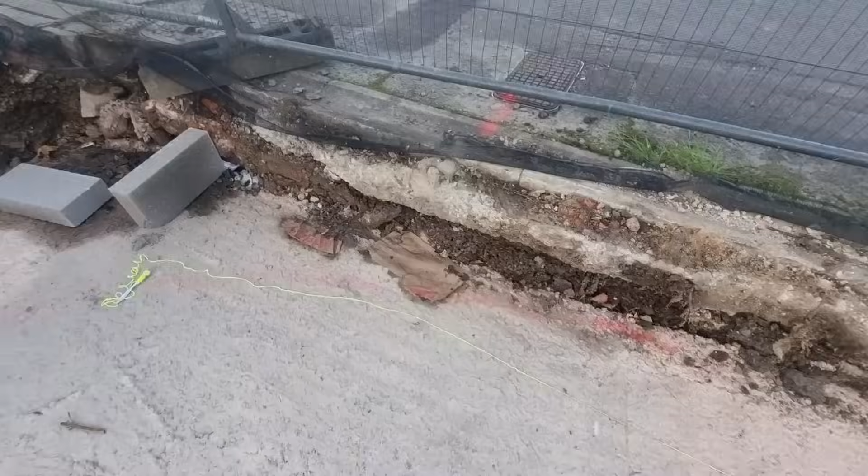If you're wondering where this beautiful job has come from, it's from the one and only Mr. RJ Brickwork himself.

So the first one we're doing, myself and Kev are here doing this wall together. Kev's putting the line, doing a rack up that end, I've done mine here. We're now going to run this section in because we're going to turn into some steps here. I'll show you it all on the drawing.

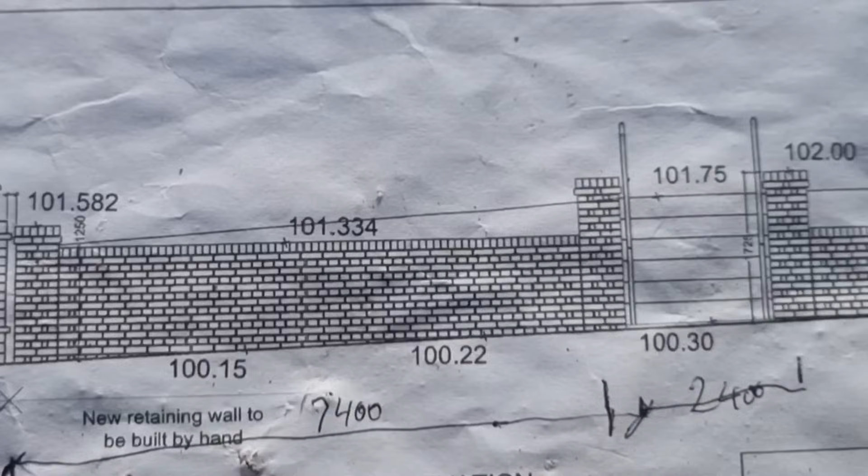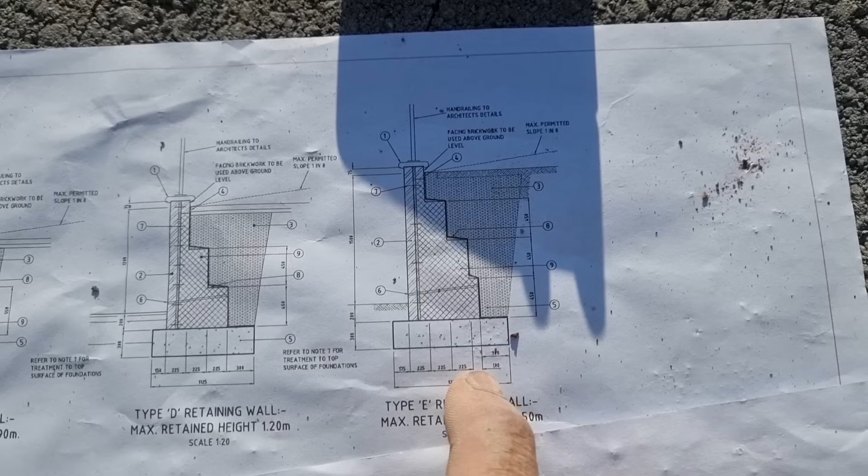So basically this is our wall. This is where Kev's stood, right down the far end by that pier. We've got a section of wall coming along here, this is in English bond. We've got a big load of blocks coming out the back, and this is how our footprint of the wall is going to be. I think it's 1, 2, 3 blocks wide and a brick, so 675, 775 wide at the bottom, and as it goes up it tapers down.

This is skin brickwork, this is block work. We're coming along here, then we've got a set of steps up to the Tesco's, and then the wall carries on along, comes along here, and then radiuses round to the end. So that's the tall and short of it.

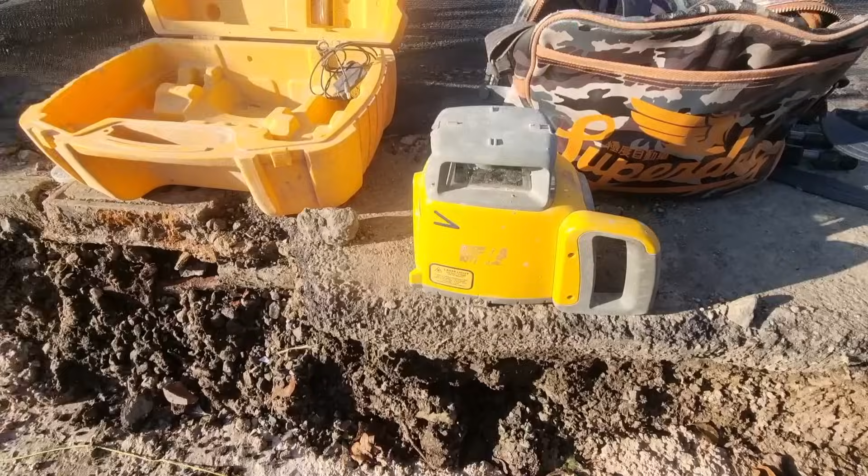So let's get some blocks down because there's a few thousand to go in this, just to make sure we've got the correct levels right the way through the job. Kev's setting up the laser there. We just started spinning, we want to keep the wall nice and level.

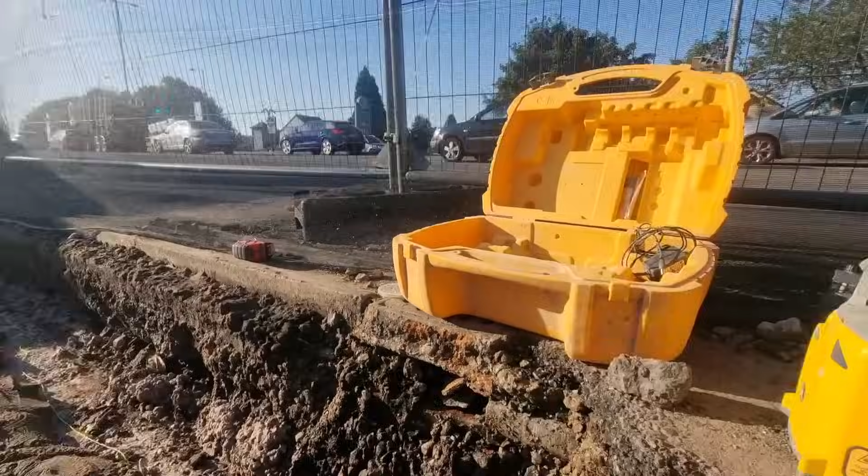So we've set the laser up, we'll set the datum up on there, and then we can just move it along to wherever we want, and we know we're going to be nice and level.

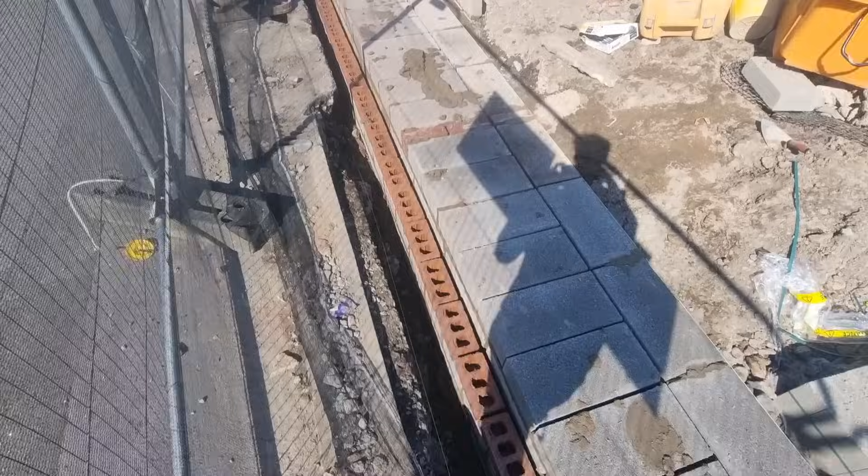Right, we've got our wall now, our retainer up to 450 high through this section here, and we've had to dry bond out because the bricks are slightly small. We've got a return somewhere around here for some steps, and there's another return there, so the steps are going to be going in this section, stepping up, stepping up. So we've got to work out where the piers are going - I think it's about there, but we've got to check on the drawing.

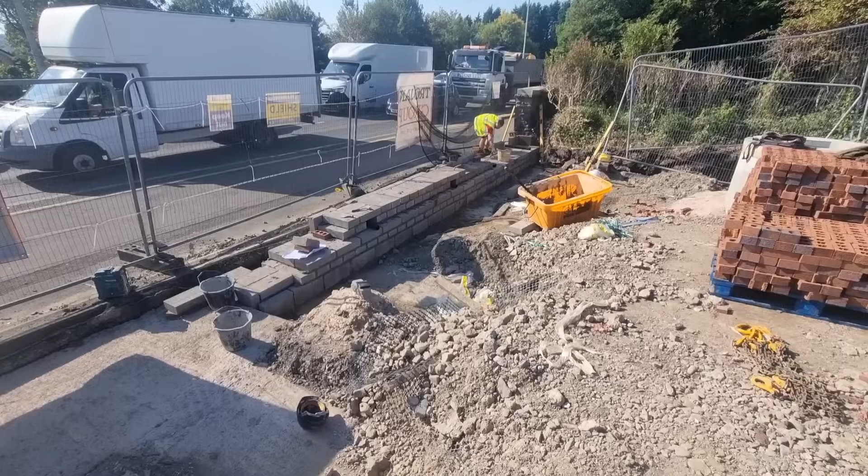Well, the wall is coming on nicely. There's got to be a good few ton in that.

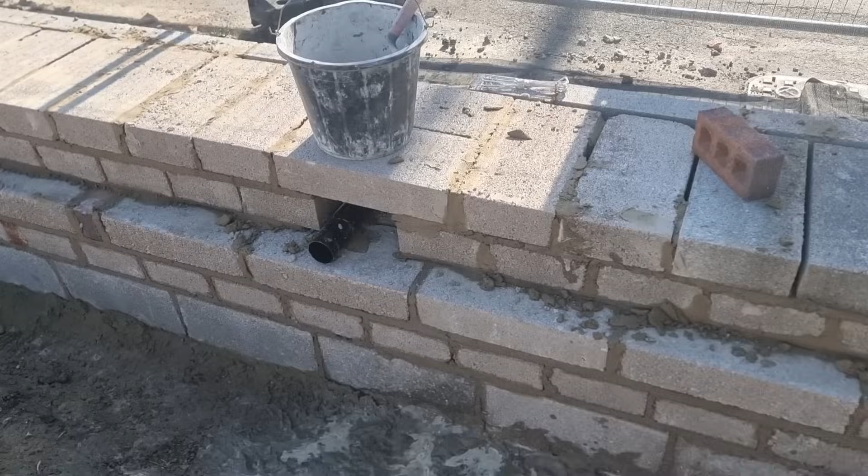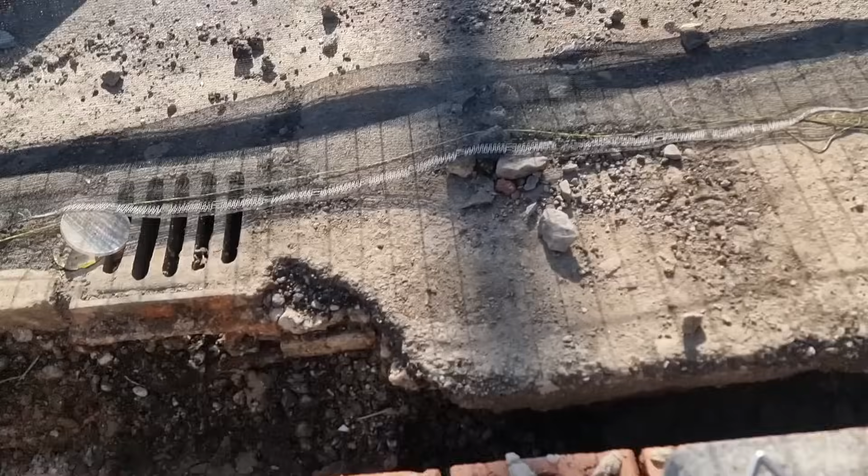Right, so this is where we got to today, and what I've done with these are the weeps for the wall. I've done them like how you would do air vents underneath a block and beam floor. Normally you put the interceptor in and then you lock these in afterwards to suit the brickwork, so I've done the same with these.

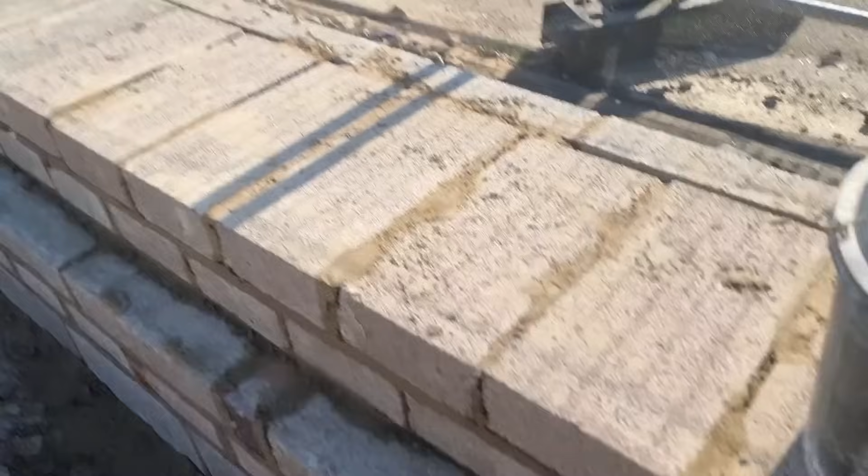We'll make sure that they suit the brickwork when they come out the front, which is pretty good. It'll probably work somewhere there in line with that one, that half back, and then we can throw a load of muck in. When we've got the brickwork in, we can throw a load of muck in here and solid this all up either side, maybe even throw a brick in there just to keep it really solid, just to jam it in there.

But really it's just for a bit of water to seep through, so as long as that pipe's in there, the water's got somewhere to escape. That's the main thing, because it's quite a high oversite here, so there is going to be an amount of moisture that's going to get through here and come out of there, so we don't want the wall getting a load of water behind it all the time. It needs to escape, because if it freezes, it expands and then retracts, and that's going to start pushing the wall over, which isn't what we want.

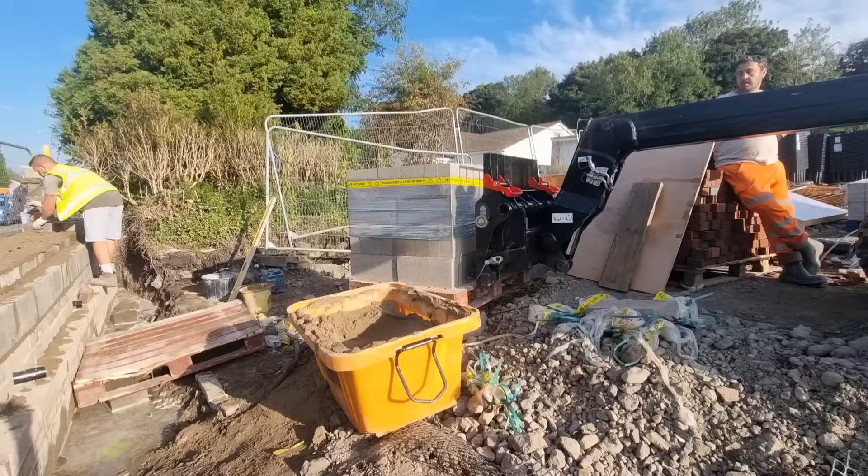Right, so myself and Super Kev have got this big lump of concrete in now. So this is all the block work for this section, and the other side of that block up there, the top part's 9-inch, but it's all brickwork from that side.

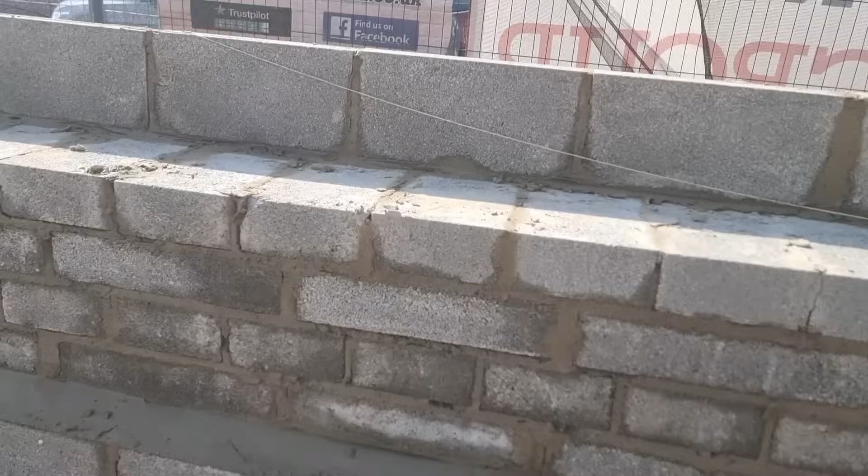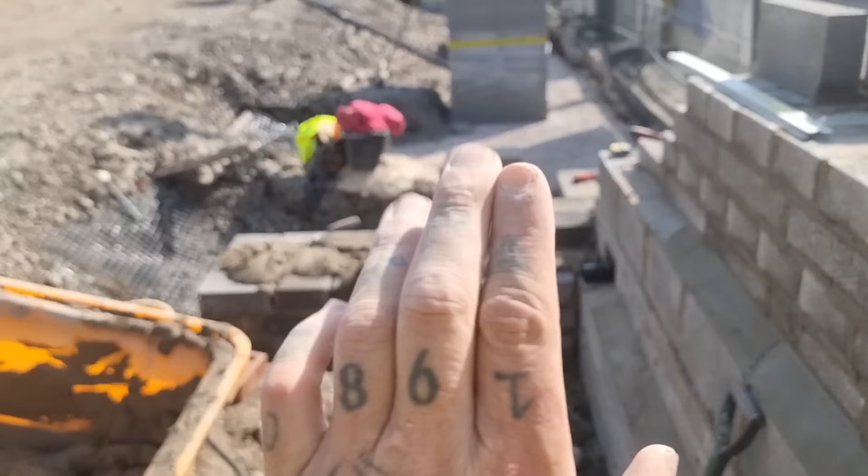And we've started setting out the return for the steps, also big and chunky, nice and strong, but that's going to taper in as well. Remember, the steps are going to be on the inside, the other side of that, so if the pressure's going this way down here, the actual struts for the steps going across are going to keep it strong and stop it collapsing.

You never would have thought that this is Wales in September.

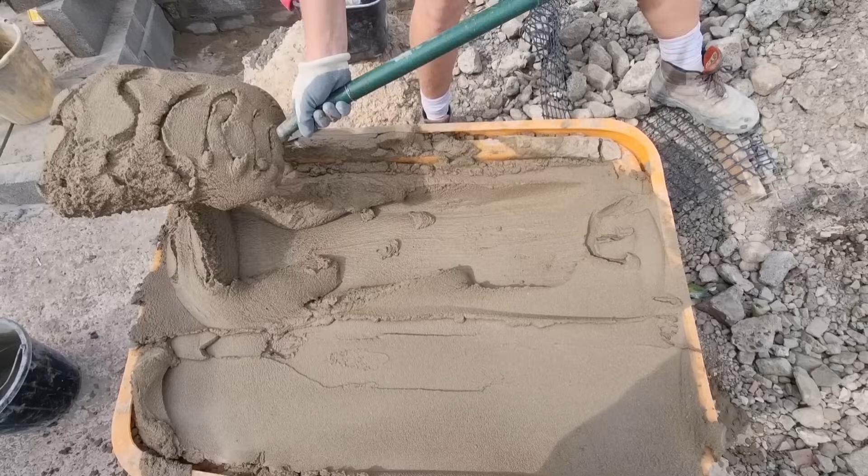Now we've got the lads back filling it for us, getting it nice and flush, making our life a lot easier, even though we've finished that side.

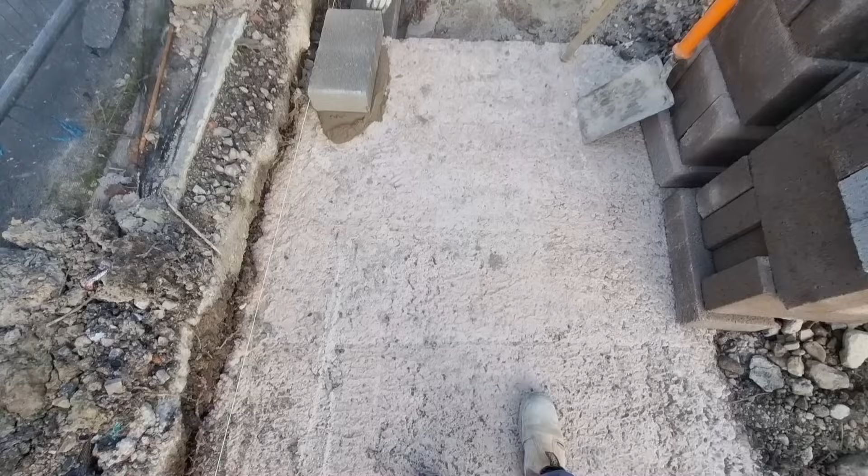Right, so the block work is now done on section number 1. So now the first section of wall is complete.

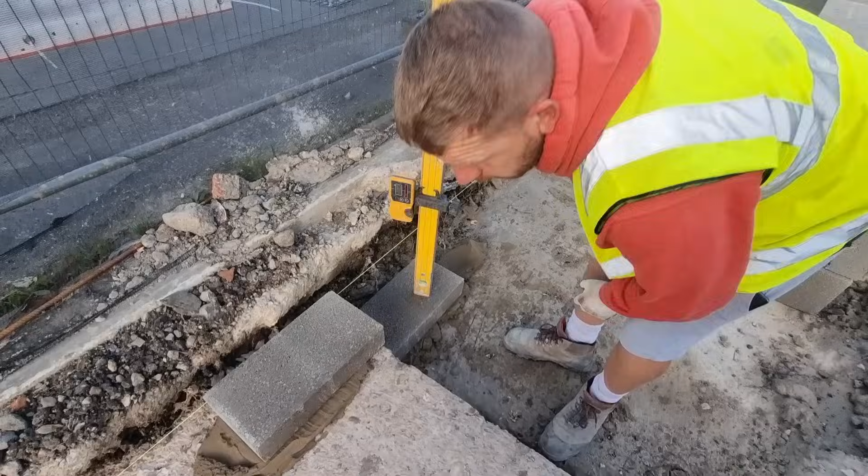Kev's just here setting up, we've set the laser up again right here. We're about to laser up this block, which hopefully will be somewhere near, not far off. But once we've got that one nice and level, we'll be able to pull this next section in. Luckily we've got some blocks right the way down here on the footing as well, so it's going to make it a hell of a lot easier.

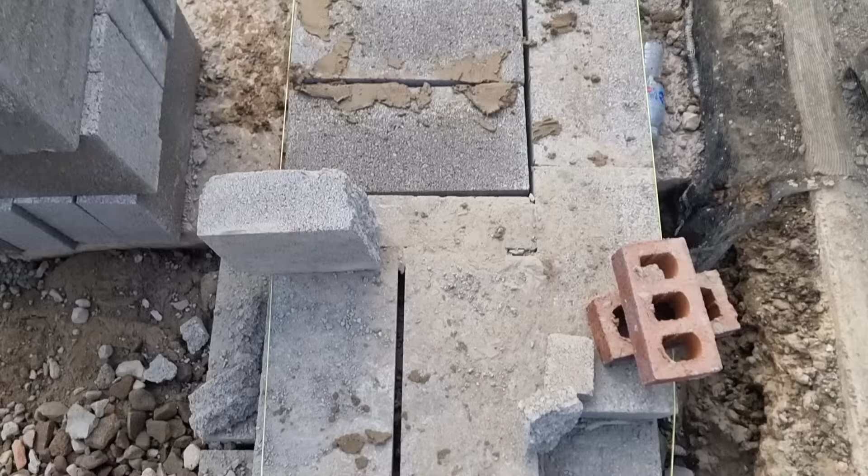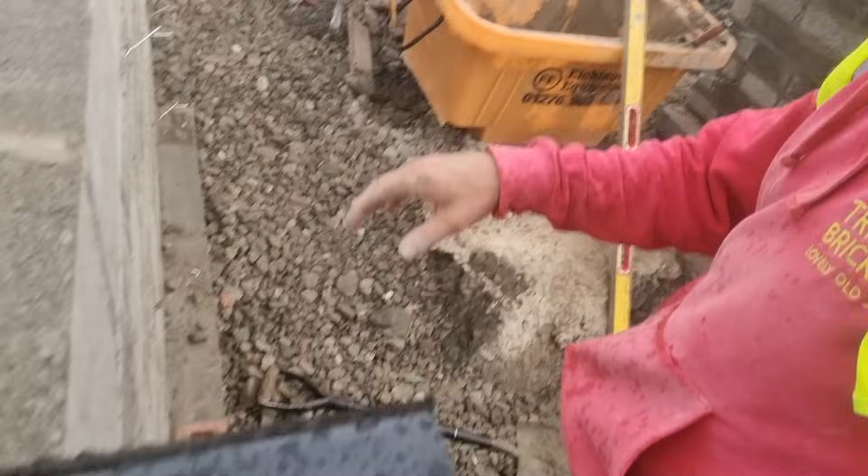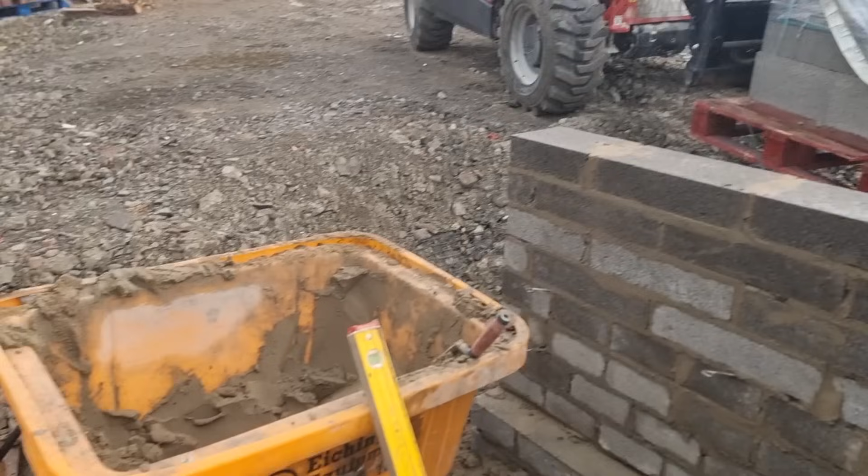So now it's Saturday, I'm here on my own. Got this up so far on my Jack Jones, the big return. Got another course of stretchers on the top, just like this, then we'll be the same height as this side. Rain's started coming down in Wales on the Saturday, but it's all good. I'm the only one on site. Got my forklift there, hanging my pack over, so they're nice and close. Tub's nearly done, I'm on my second tub today already, and it's about 10:30.

Right, so now it's Sunday morning. Today I'm not going to go huge. I just want to get this section of wall here right away up to this level, right along to where I've put the muck down over there. Nice bit of straight work.

There's 1, 2, 3, 4, 5, 6 courses to go on here. Counting along the top: 1 through 30. That's 30 times 6, 180 blocks.

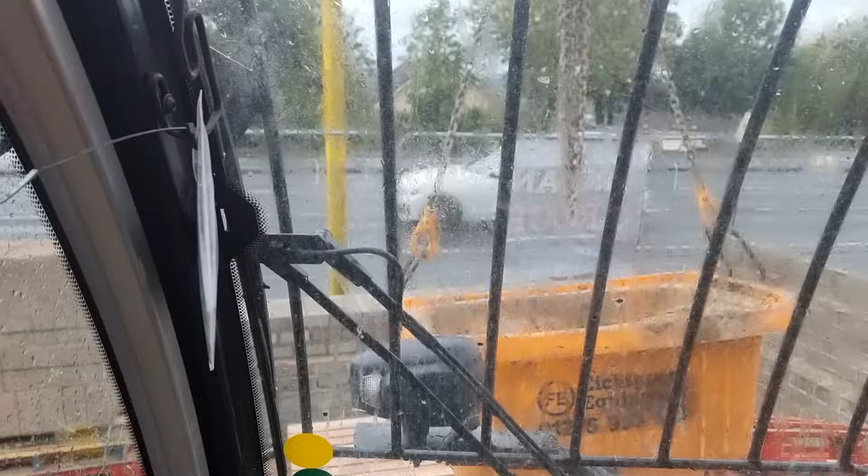Let's go. I've set up some pallets down here to square this up. We'll get this down here, somewhere about here. Now I'll push this lever forward and that's going to bring the boom down. I'm going to hit it on the ground just to steady that tub up. There we go, now once it hits the ground I'll stop rocking, and then I can boom it out a little bit and drop it straight down onto that pallet.

Bosh, happy days. So there we go, that's all of them in there, and it's just gone 11 o'clock, so that's not bad - 200 there in 3 hours. Woo-wee! Come on, Tricky. Oh God.

Jesus, now look, absolutely pissing down. Next to nothing muck left in there, and only 1 block left on the pallet. That can mean only one thing - I'm getting out of here. Oh my God, it's peeing down.

So we're having a little respite from the wall down there in Fforestfach today. We're on another one - we've got to do a simple 4-inch wall through here, a few piers in it, in blocks. Got about 600 to 700 blocks here to do.

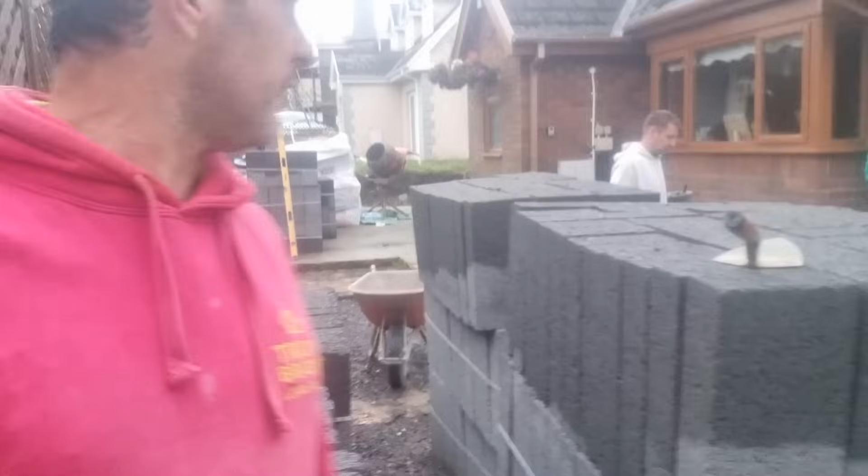Oh, the old gaff, Trekkie. One through there, right near Rob's old gaff - that's where Rob used to live, right there back in the day. But obviously we built him a new one, so he didn't need that one anymore.

All of these walls around here are like rock face, across the way - they all look rock face, just like here. It's a fair face block work on this, boys and girls. And we've got another little one to do over the other side.

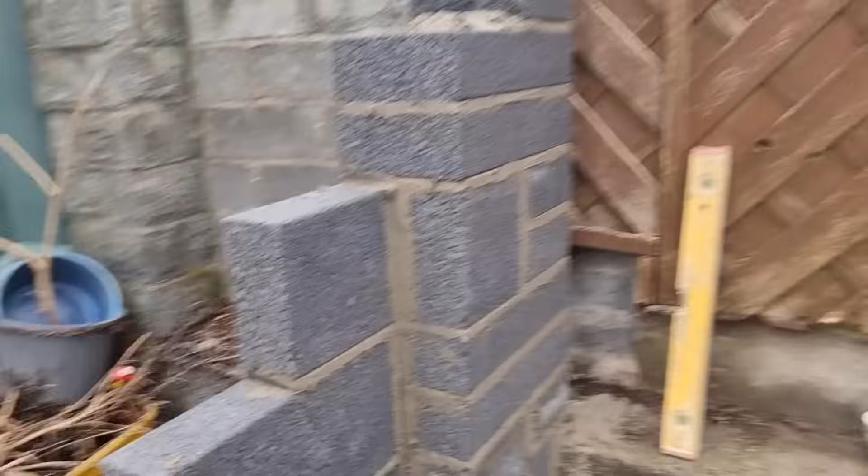Chrissy, yo. But yeah, we've got our corner up here now to show you. Right, what we got - there we go, all bonded in, all strong, belly flat, all built into the wall, nice and strong. We've got one more course to go on top of there.

Built-in piers in the middle, bit nice and strong. Cool, look at them guns. Gun show, baby. Oi, oi.

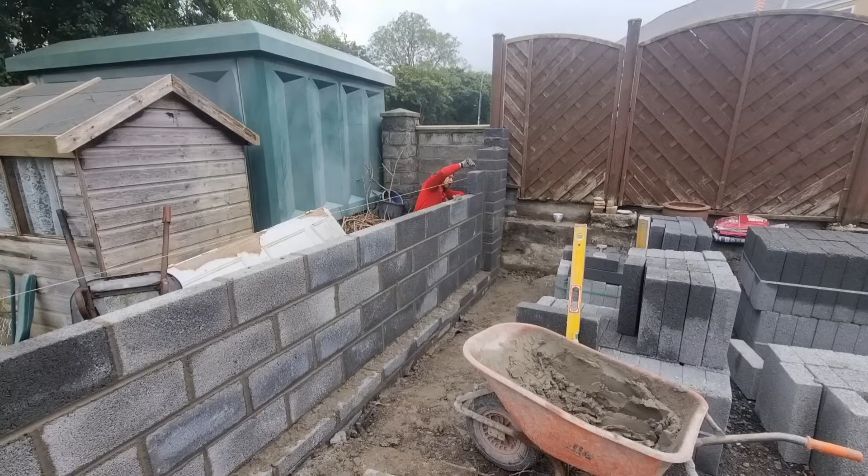Right, so that is as far as we're going to go with that on this side today. We don't want to go too high because we don't want it to wobble. So we're going to head over to the other side now and start that one.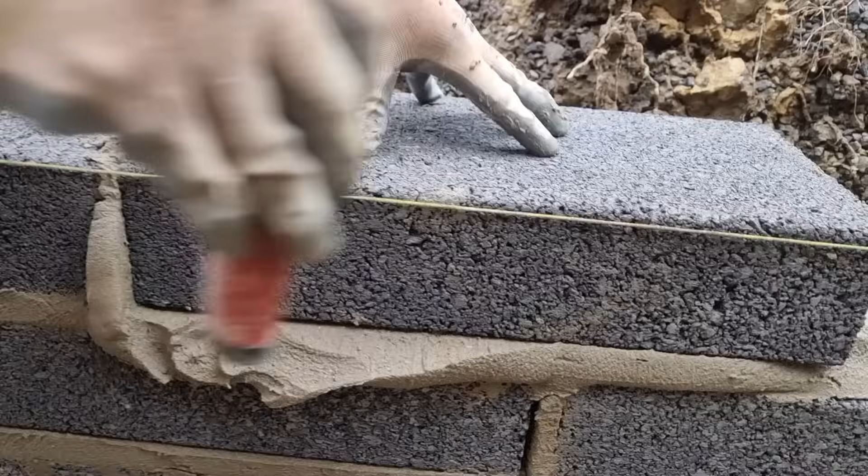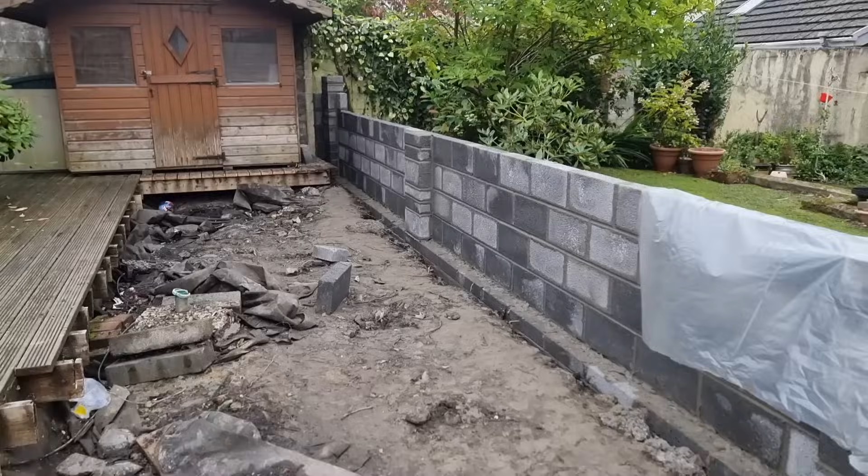So that wasn't a bad day over here. This one pretty much, most of that one in, and we've got a big chunk of the one over there in as well.

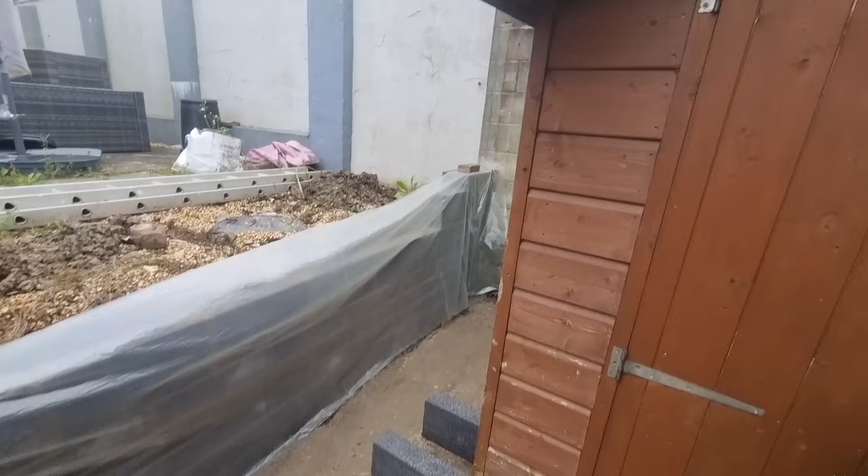So happy days. And just for peace of mind, we put some sheets over it to protect it from the weather. You can never trust the weather in Wales.

And now it's time for the bricks. That's right, ladies and gentlemen, we are bumping out the bricks. We're going to start bricking up the front of this section here today. We're pushing the fence back, so a big push, getting a load of bricks loaded out, all of us. Many hands make light work. Nathan's on the mix, and we're going to be slashing in the bricks, English bond, at the front of this beautiful retaining wall.

Right, so we're setting out our piers now at the front here. It's an English bond, so we'll be going header, queen, header, queen. This is dead in here, we're not going to be seeing that, but then it returns round.

We're going to keep it just a touch off of here so we can get through there nicely. It works headers all the way along this way for this course, then we'll revert round to stretcher bond then, so that one will come in there. That'll be half bonded with that, 2 stretchers there, and then it all works. But I'll show you more of that as we go up. Basically, that's what the pier is going to look like when it goes up here.

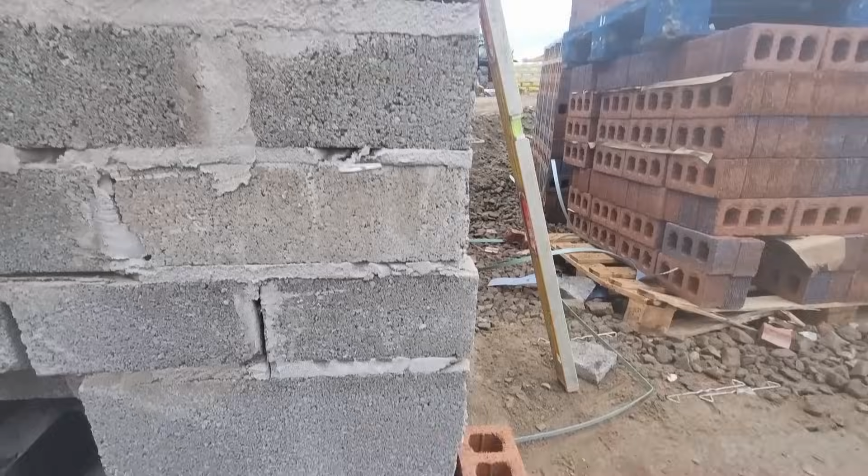So finally, after most of my regular viewers know, I've been doing slabs for ages and ages, so to get onto brickwork was a real pleasure, and to do a bond like this, which you don't normally get to do very often, it was even nicer.

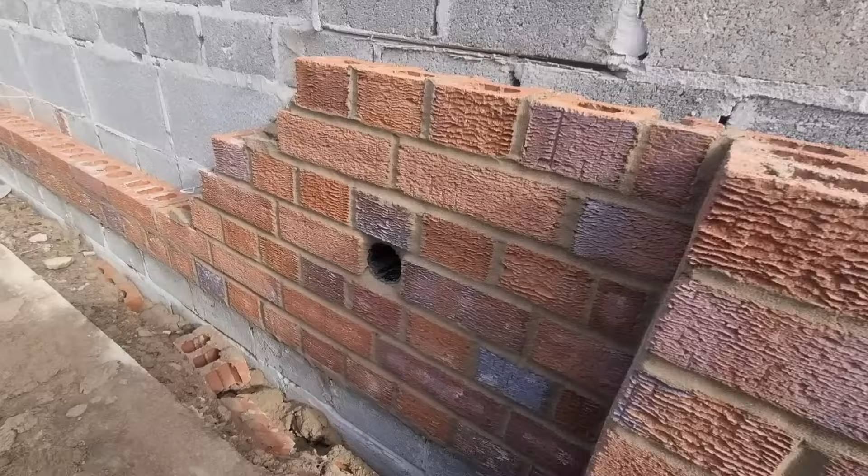So there we go, that's what we're looking to achieve here. This is an English bond pier, all set out now, tailing off, and then going around the bond following round. And also we've got the weep vents set in how he wants them there. Might have to tidy that up a little bit more, there's a little bit of a hole there. There we go, but yeah, that's what we're looking to do.

Kev's down the other end doing his one. So we're going to carry that on now, and that's going to go right the way up to the top. I'll show you that now.

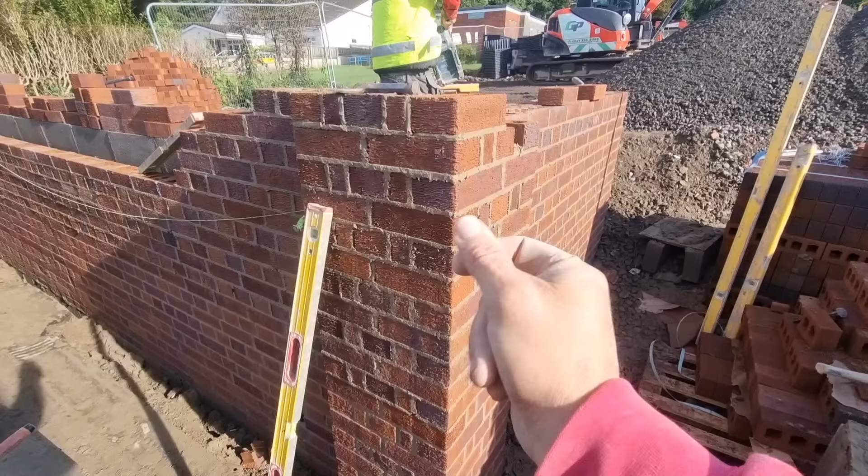And there we go, there is the pier up to there. We need to point it still. We're doing a bit of running as well. But now quickly we're going to jump over to the other job and finish that block work.

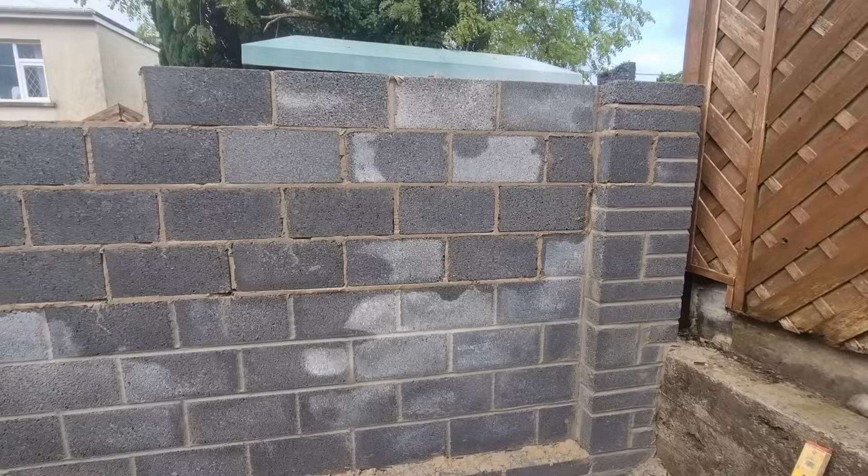So myself and Kev quickly ran in these piers along this wall and got the other side up as well, so that was another job done.

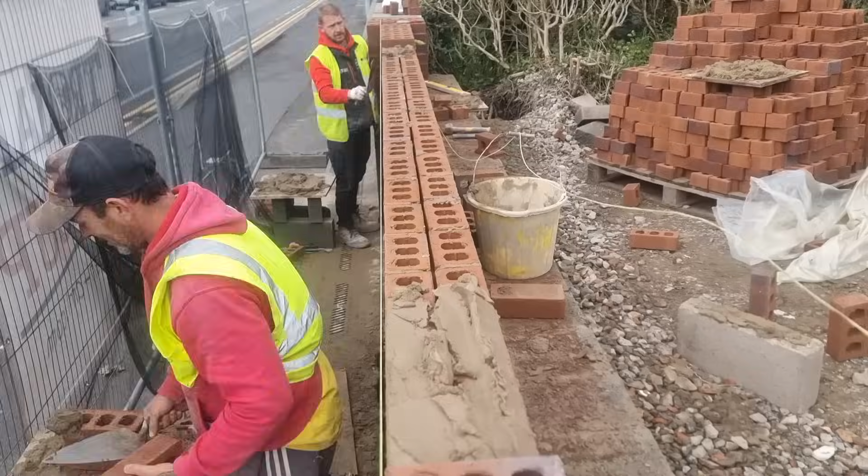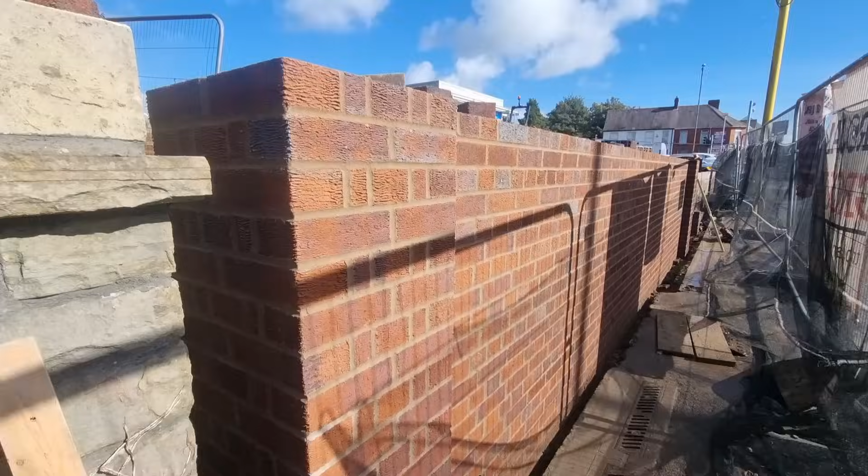Then as soon as we finish that, straight back onto the retaining wall again, getting the 3 courses up above the block work, getting them there. All that's left to do on top of them now is a brick on edge, but the piers have got to go higher. We were fighting the weather, but finally we got somewhere.

Right, now it's Saturday morning, I'm over here on my own again, and I'm going to match that pier now right here. I've already started building it.

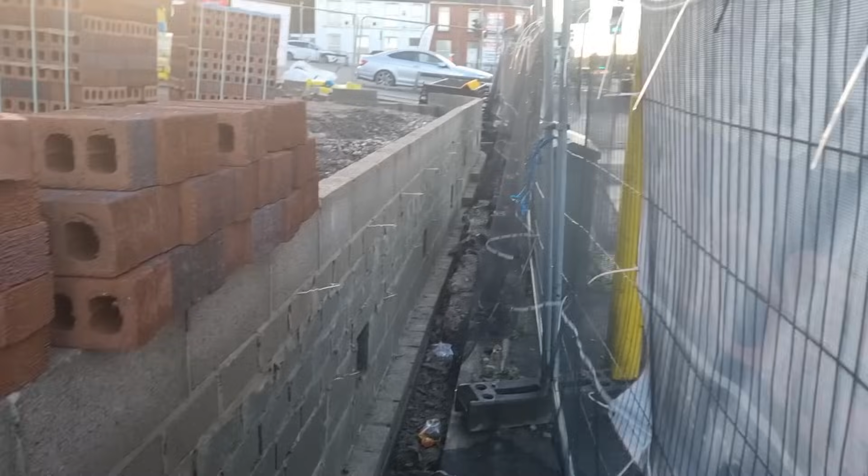I'm going to rack it back both ways, then I'm going to fill this panel in here, get this all filled, then I'm going to go down to where the radius is, and after that I'm going to build like a big rack down there, because we've got an expansion joint at the radius. So I'll be putting in just an upright down there, just a single rack, and then we'll be able to pull from this corner here all the way through the job.

Gonna have to pull this fence back and stuff, but I'm going to stack my bricks from these packs that I've put here straight onto the wall, so I won't have to stack anything down this side. I literally just need to be able to walk along here. I'll have my muck board and everything on the wall, be a lot easier, and it's a nice height as well.

And there we go, there's that pier up. I've chucked a couple of tubes in. I know you're not supposed to, but it got me up there. So we're all racked nicely there now.

So I'm going to quickly run this bit in now through here, get this all up to the same level, and then yeah, go down here and hit a rack down this end. This I'm just going to do, just going to run it in with my level. It's not going to be hard. Got my tub there, bricks there, couldn't be any closer really. Lovely.

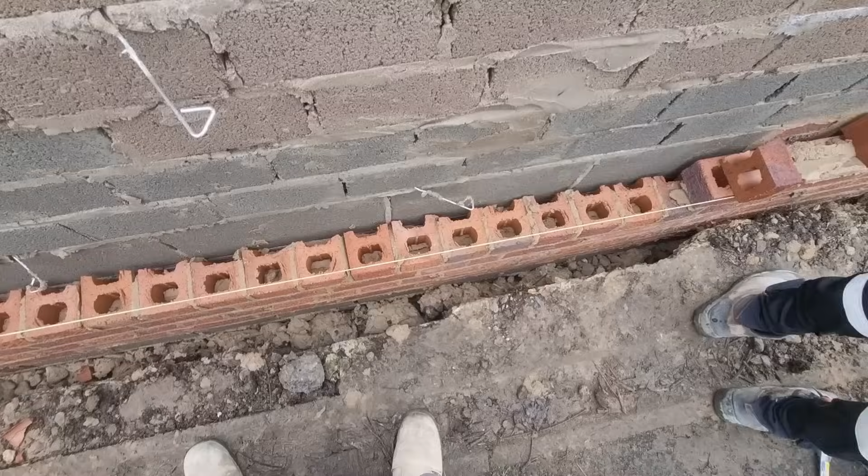So it's all go now, we're running in the flank. Well, yesterday the rain absolutely poured down. We managed to get that much run in before the showers came in. The weather doesn't look good today. We literally are fighting away between the showers, trying to get this wall done. We are getting through it though.

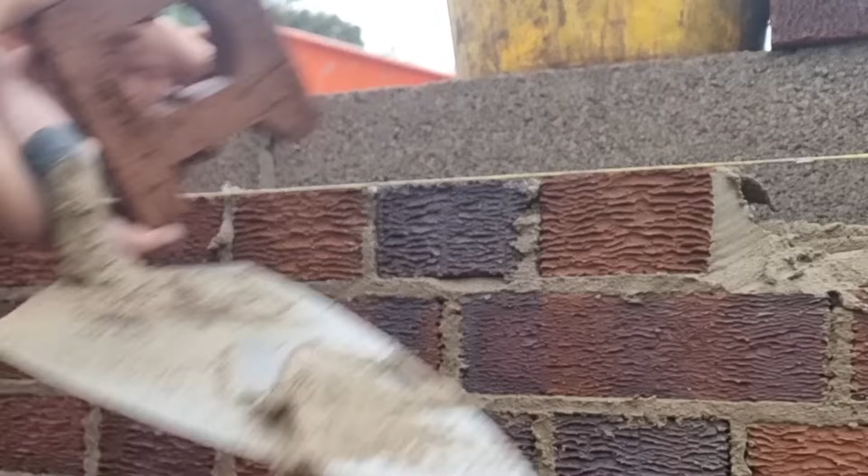Finally, that's that flank up to a nice height now. So now we're going to crack on along the front here, myself and Kev, and get round up to this radius.

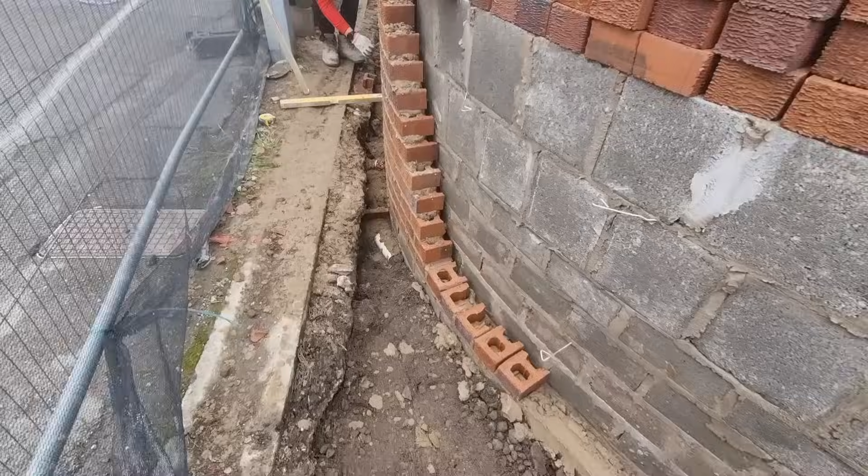And now it is time for the radius. There's no other way to do a radius other than get down with your level and level it round. We're doing it with halves around here to keep the bond right and to get it flowing round nice and neat. So I went round levelling each course as I went and making sure it was nice and upright at the boning points.

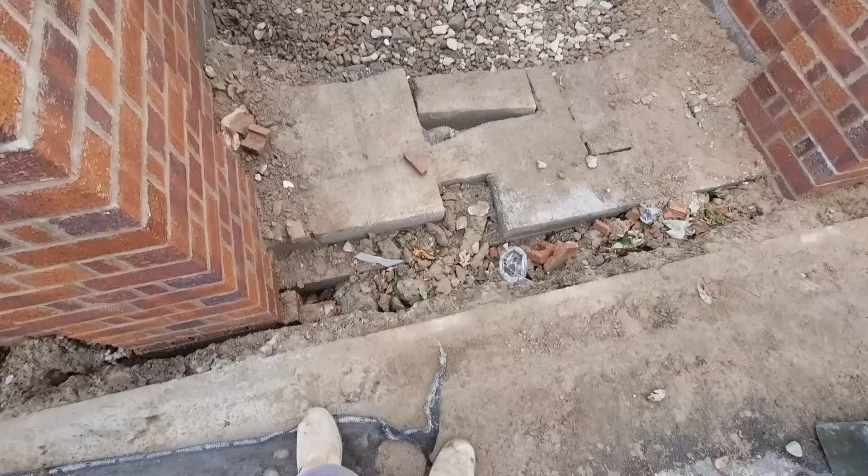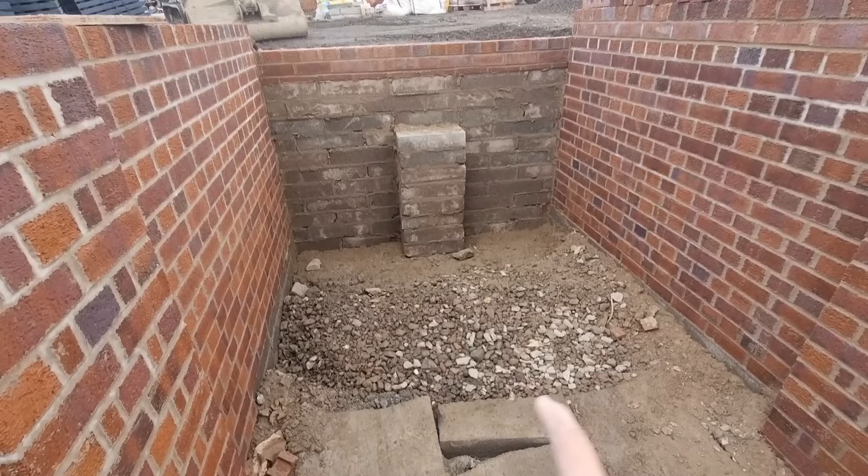Now this is the section where the stairs are going to be going in, so we put a retainer in here as well to hold the back of these two legs solid. Then all of this will be filled in with steps eventually, but not yet, because we've still got to get the rest of the radius done.

We've got the boys cutting the bricks now to make it easier for me in the morning. Right, so now it's Wednesday and I don't want to be here any past Friday.

I've got a little left to do on this wall now. I'm on my own, the rest of the lads have gone to another job. So I've got to finish the radius off, which I'm getting a way around now. Then I've got to back up that last section of wall with 3 courses on the inside to allow us to put the brick on edge on. Then I've got a brick on edge over the whole thing, and the piers have got to go up a bit as well. So I've got a lot of work in front of me for the next couple of days, but I want to be out of here by Friday. Let's see if I can do it.

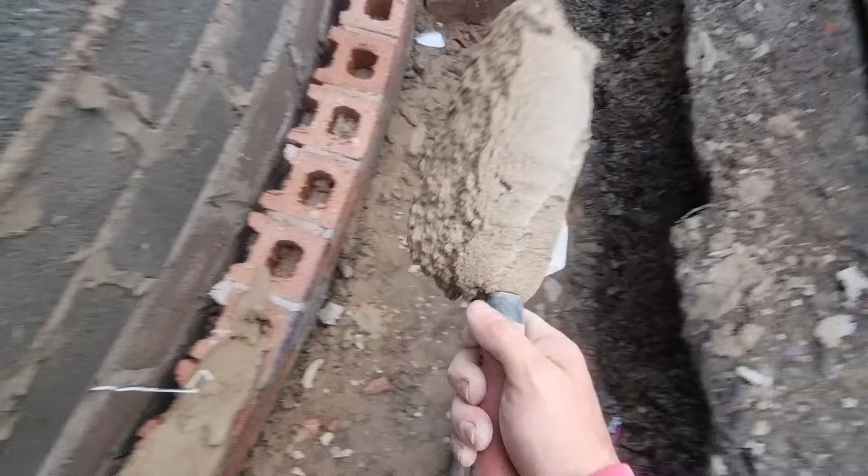So let's get the mix on. And now it's time to get that muck on the wall.

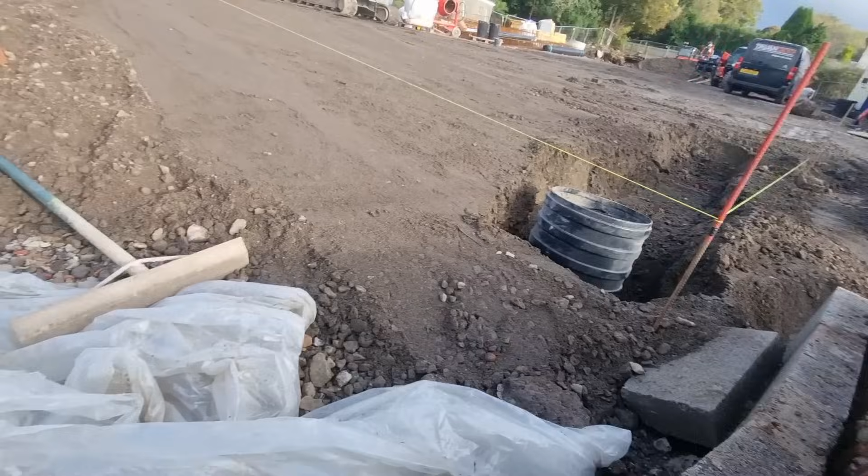And there we go, the radius is round to the end. Lovely. I've just left a couple off the end there because they've got to tie in when I back up this side, so that's the next job. I'm going to go along this straight, get all of these on all the way through here, get it all up to the same height. It's 3 courses right the way around to this end. Then we're really starting to get somewhere.

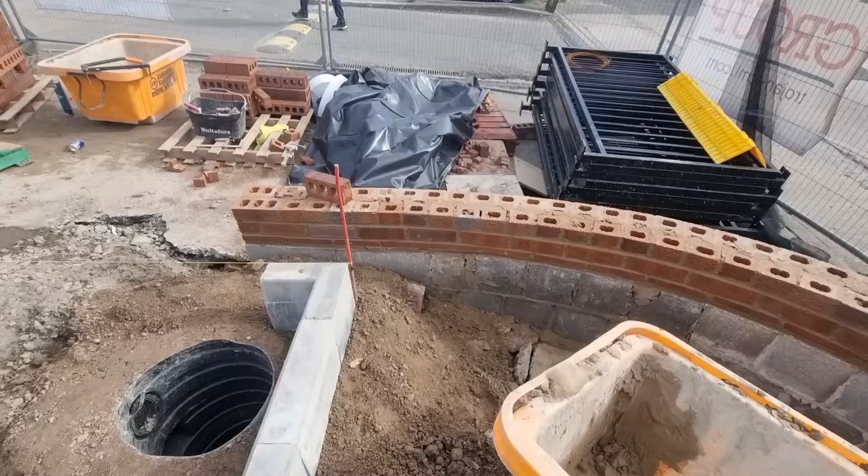Right, so now that all the backing up is done throughout all the wall everywhere, it's time to get these piers up. Now I've just spoken to the site agent and he's not sure whether these sides here are going to go up with the rake of the stairs or not. He hasn't got an elevation drawing for that part, so I can't put the brick on edge on there, and he only wants me to go up another 4 courses on these piers for now, just so I can get my brick on edge on everywhere else. So all he wants to do is leave the detail off and the brick on edge on top of the piers off for now. That's gave me a bit of a boost, because it's less for me to do before I've got to go home on Friday. So I'm just going to get this pier up 4, that pier there up 4, the one down the end has only got to go up 2, then I'm going to start doing the brick on edge.

So there we have it, there's them 2 piers up. I've also done a little rack for my brick on edge here, and down the other end here we've done the brick on edge, and I've set my lines up. And of course this pier was only 2 courses high, so that was nice and easy. So now it's bombed out through here, ready to do the brick on edge.

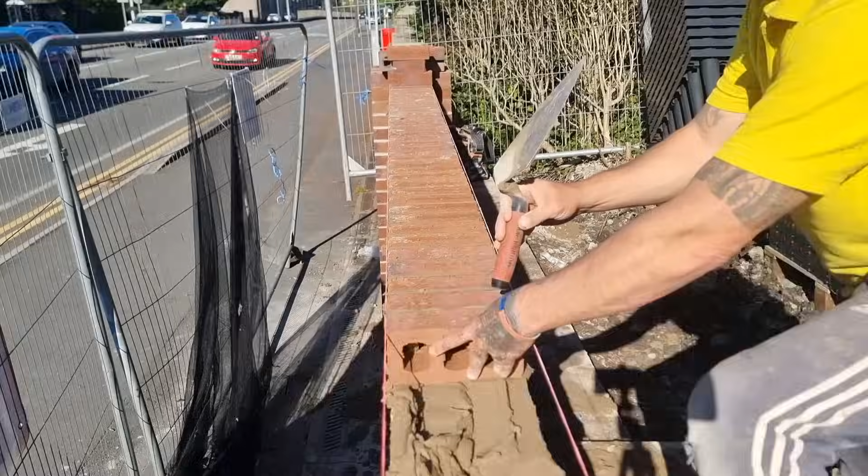Right, so the last bit I've got left to do now, I've got about 60 bricks left. Just come along this wall here and around the radius, and that'll be me done on the wall. And it is the end of Thursday, so coming in tomorrow morning, hopefully I can get them on within a couple of hours, and I'll be on the road home about 9:30, 10 o'clock.

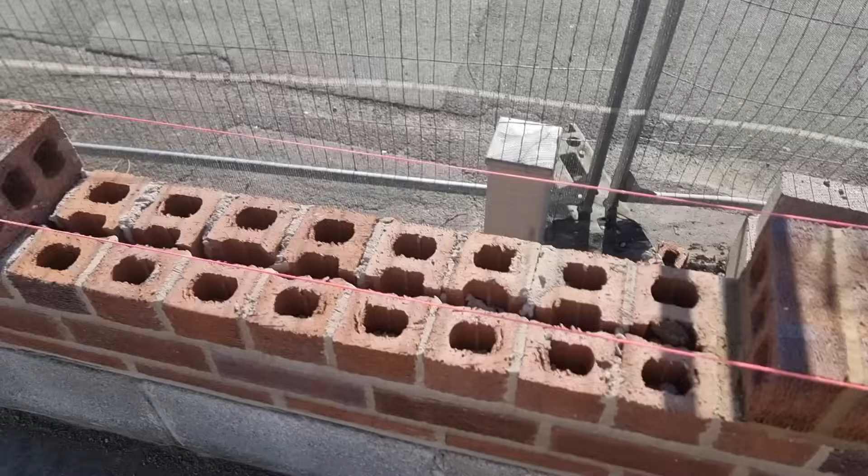Come on. Right, so the last bit I've got left to do now, I've got about 60 bricks left. Just come along this wall here and around the radius, and that'll be me done on the wall. And it is the end of Thursday, so coming in tomorrow morning, hopefully I can get them on within a couple of hours, and I'll be on the road home about 9:30, 10 o'clock. Come on, beat the traffic.

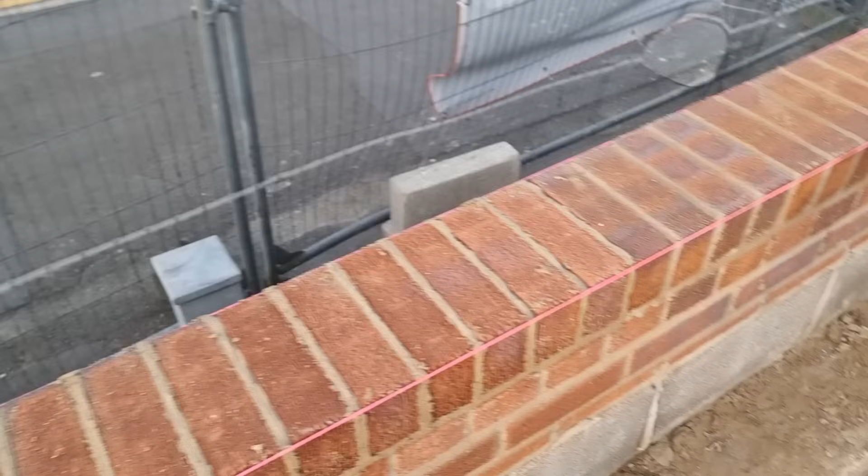Right, it's Friday morning, the traffic on the road is as busy as ever, and so am I. We've just got the last little bit here to do, so let's crack on with it. I've already got them ones down, this straight bit, that's the end of the straight work. Now we're starting the curve, freehanding, brick on edge right the way around to the end.

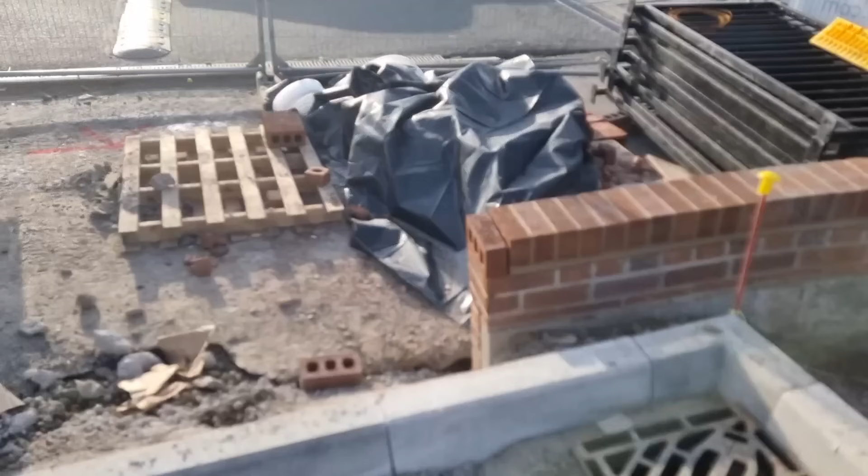So there we have it. We are all brick-on-edged right the way around the whole job. Finally, I'm done. I've left the one brick off at the end because obviously that's going to be a solid right there, so there's no need for me to put that one on. But as for the rest of the wall, everything I can do here has now been done. So it's time for Tricky at 9:30 to head home to Essex. Come on.

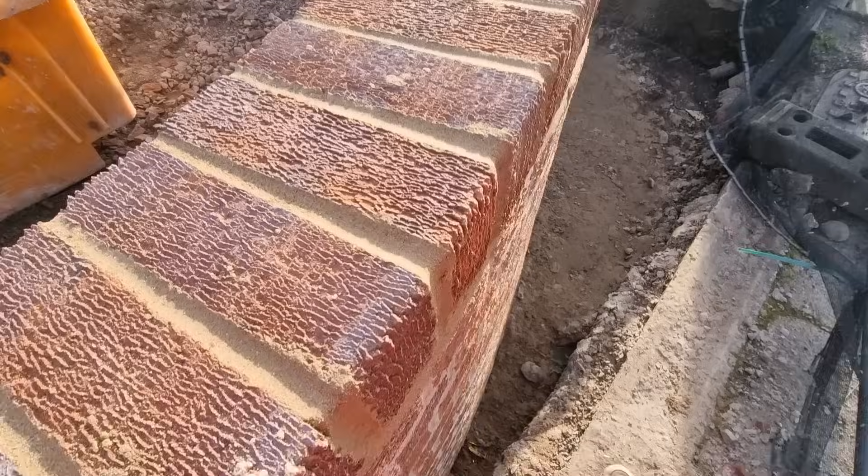So there we have it, just behind all them cars is that great wall I've just built. It's all done now, ladies and gents, all sorted. Tricky's time to go home after a perilous week of laying bricks in and out of the rain, but we persevered and we got the job done.